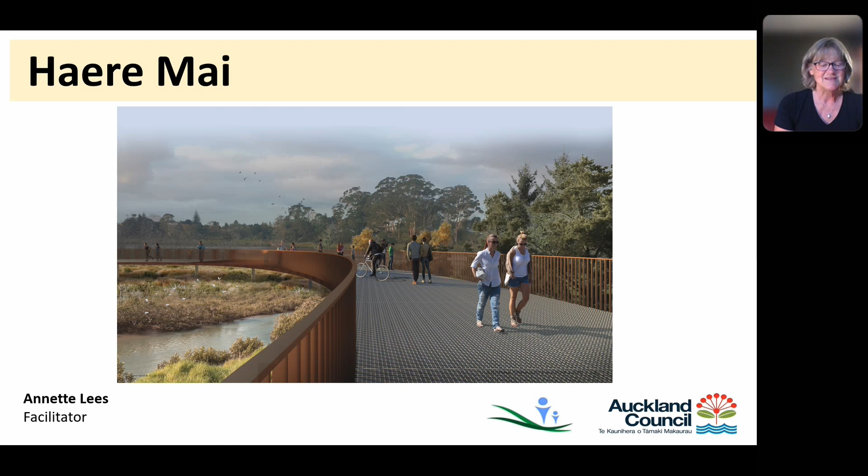Hi everyone, I'm Gill Thurlow. I work for Auckland Council as the local parks pathway lead for Te Whau Pathway project. I've been involved in the project for about 3 years, and it's a real pleasure to be here tonight because this is quite a milestone for the project, presenting the preliminary design for people to give feedback on. It's just great.

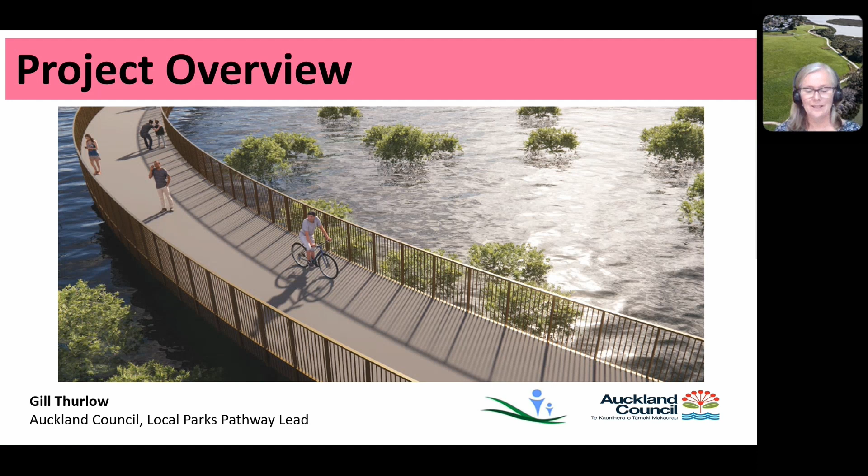So I'm going to start with an overview and where the pathway will go. Te Whau Pathway is a shared path, connecting between the Waitemata and the Manukau harbours. At one end, we've got Te Atatū South near the second exit on State Highway 16, and at the other end, we've got Green Bay Beach. It will be Auckland's only mainly off-road route connecting the two harbours, following the historic portage of the Whau River, and celebrating it.

Through the pathway and the project, we're really keen to connect people to the places, to each other, to the green spaces, and to the awa. It's an amazing opportunity, and it will be an amazing experience. In total, if we count the connector paths, there's about 15 kilometres of pathway, and just over 11 if we're talking about the main alignment.

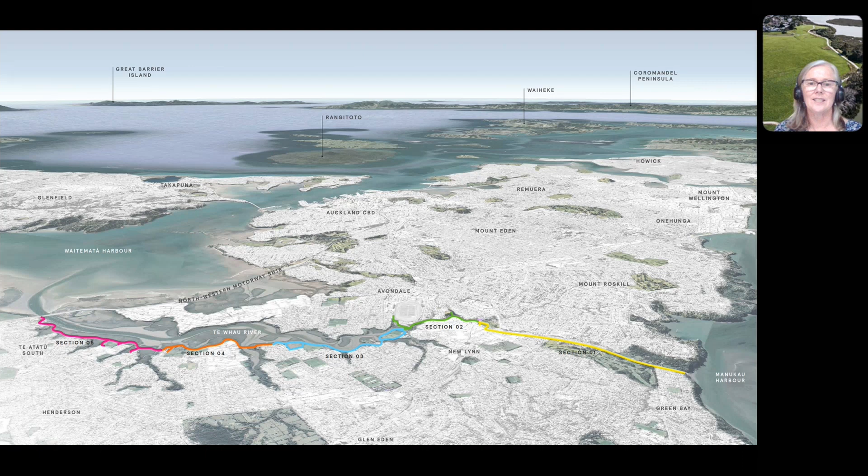So that's the pathway. In terms of the project, Te Whau Pathway project is a partnership project, and it's been a collaborative effort to get to this stage. There's been some pretty major milestones from its first inception in 2014. The idea was first seeded in 2014, and it was championed by the community as a greenways connection.

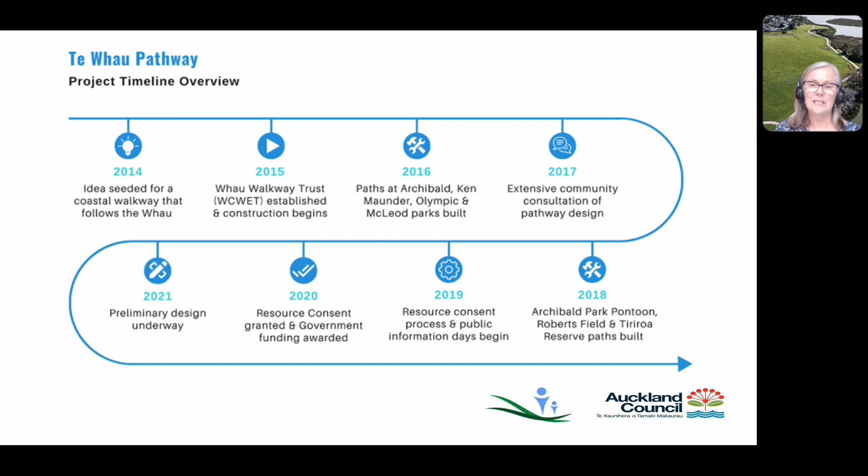As I said, the decision was made to build the pathway in sections, so concrete footpaths have been developed and built in some of the local parks. There's been extensive community consultation on the pathway design, which has informed the concept design and the landscape design plans. A real key year for the project was 2020, when the resource consent was obtained for the whole alignment. It was also the year we were fortunate to get some government funding for the shovel-ready projects. The construction of the sections of Te Whau Pathway have been underway already.

In 2016, we built some concrete paths in Archibald Park, Ken Maunder Park, Olympic and McLeod Parks. 2018 was for pathways in Roberts Field and Tiriroa Reserve. And most recently, we've constructed some pathway in the Rizal Reserve section in Avondale, as part of the shovel-ready build.

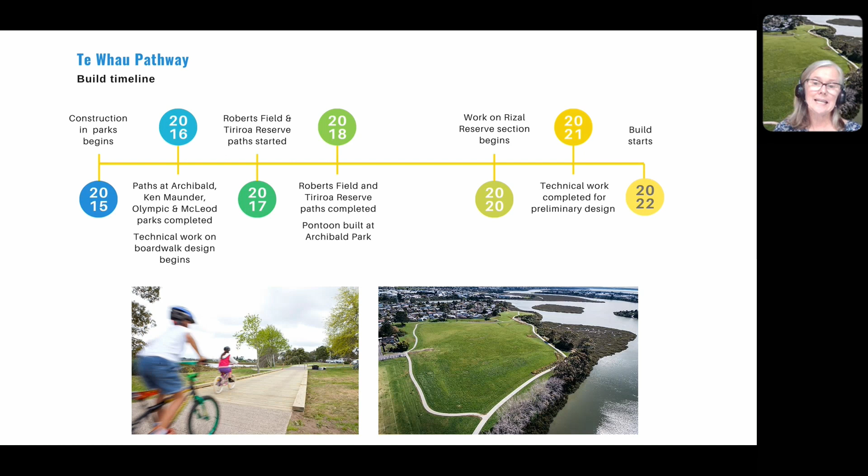It's been through a large amount of effort from our project partners, who I'll introduce to you soon, that we've built 3.7 kilometres of the pathway through the local parks to date. The majority of the path is still to be built, and that will be done in stages as funding becomes available. Yeah, it's all looking pretty good.

This is a really great overview of the pathway and its connections to other networks. You'll see the pathway as this bold pink line through here. Where the areas are dotted, those are the sections we've already built.

The really exciting thing is that the Whau pathway connection will go to the New Lynn Avondale shared path, onto the Waterview shared path, and then you can go onto the Northwestern Cycleway. That completes a pretty unique 21 kilometre loop, a really exciting addition to Auckland's growing walking and cycling path network.

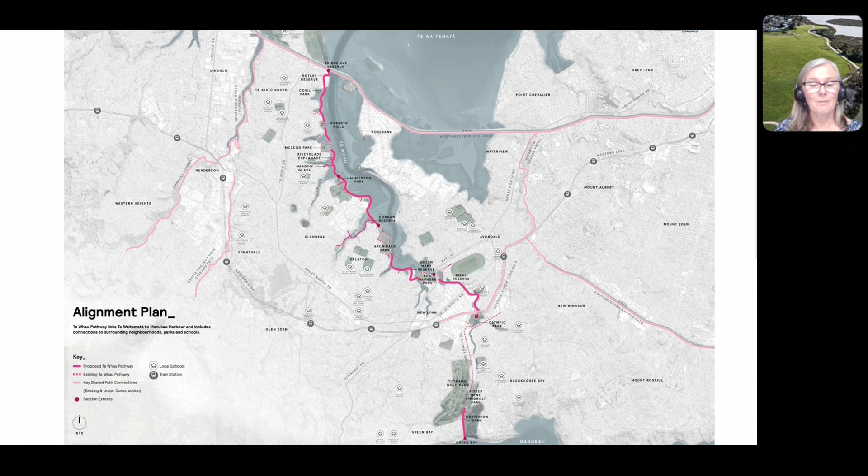The build and the funding, the things everybody's really interested in. As I said, 2020 was the turning point for the Pathways funding. As a result of COVID-19 and the pandemic, central government considered funding infrastructure projects valued over $10 million. These shovel-ready projects needed an immediate stimulatory effect on the construction industry, the workforce and the economy. Auckland Council applied for the infrastructure funding, and we were successful.

Crown Infrastructure Partners, the central government body, agreed to fund $35 million towards the design of the whole pathway and construction of sections 2 and 5. This is where our first shovel went in the ground, into the Rizal Reserve. And here we are, waiting and looking forward to your feedback on the preliminary design.

It needs to be noted that when we submitted the proposal to CIP, it was based on 2017 concept plans. Since then we've developed the design to the preliminary stage, based on all the information from previous consultation. The resource consent conditions have needed to be taken into account, as well as those early foundation documents. So the preliminary design of sections 2 and 5 has informed us, and we now know what's possible to construct with the available CIP funding.

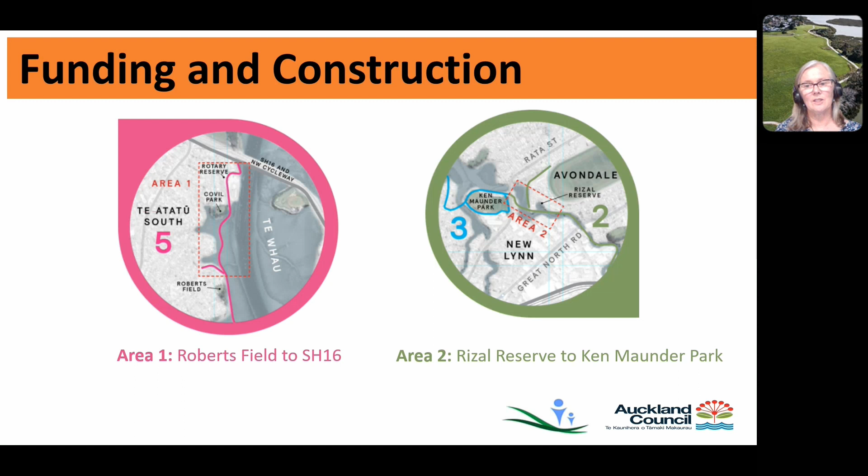This is the Henderson-Massey section. There are a lot of factors impacting how much boardwalk we could build. Early in the design phase, design decisions relating to durability in the marine environment, earthquake sustainability, and a requirement for a 50+ year design life with minimum maintenance all had to be taken into account. We wanted to build a long-lasting structure.

We have 168 plus resource consent conditions we need to respond to. We're very much aware of the building supply and construction costs in the current markets, so our design has to respond to all of those factors, as well as managing risk and the uncertainty around ground conditions. Those are some of the factors that have impacted how much of the boardwalk we've been able to progress in the design and the eventual build.

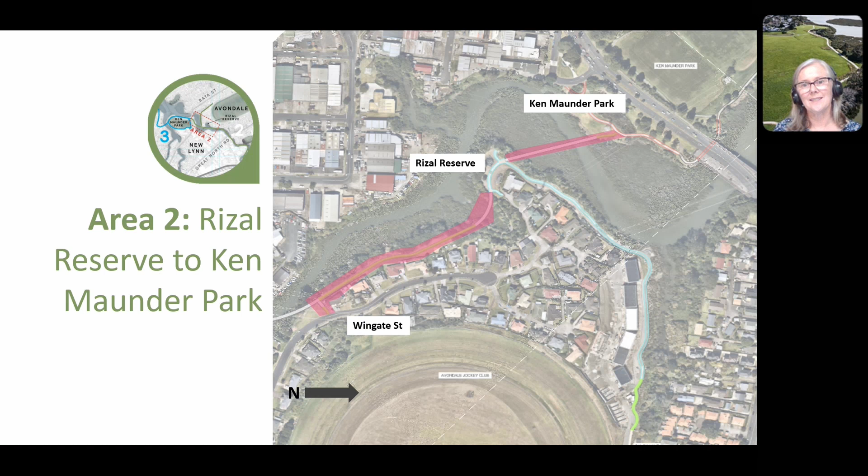This is the section in Avondale, in the Whau Local Board, and this is the pathway we'll be building - the slightly blue coloured path. This is our shovel-ready section that we've just finished. We've got a little bit more to do at each end, but this is that key crossing across the Awa. If you want to look at these in more detail, please go to our website.

Te Whau Pathway project is a collaborative partnership, and I'd like to thank our project partners: Te Kawerau ā Maki, Ngāti Whātua Ōrākei, Auckland Council, Auckland Transport, Henderson Massey Local Board, Whau Local Board, and the Whau Coastal Walkway Environmental Trust. Without them, the project wouldn't have progressed as it has, and we're very grateful for their ongoing support.

Thanks, Jill. That's great. I love that historic connection to the waka portage. And it's also good as Aucklanders that we get some silver lining to COVID-19 with getting that government support to build this.

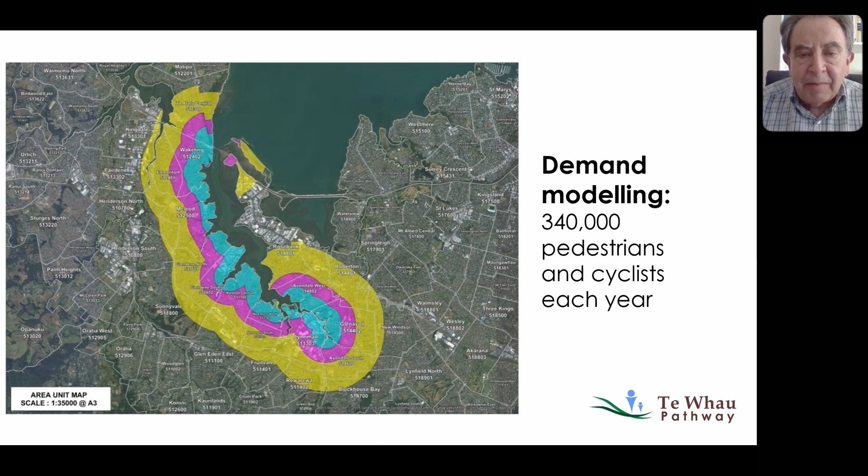Just a brief snapshot of the project. You'll see the area of influence, and modelling carried out by traffic specialists shows that when completed, it'll attract 340,000 pedestrians and cyclists each year, with almost an equal mix of recreational and commuter cyclists.

A snapshot of the Whau Coastal Walkway Environmental Trust. We were established in 2015 with the purpose of promoting the community and linking it to the Whau River. Our vision is to construct a shared pathway linking the Manukau and Waitemata harbours, while achieving social, cultural, economic, environmental and health benefits.

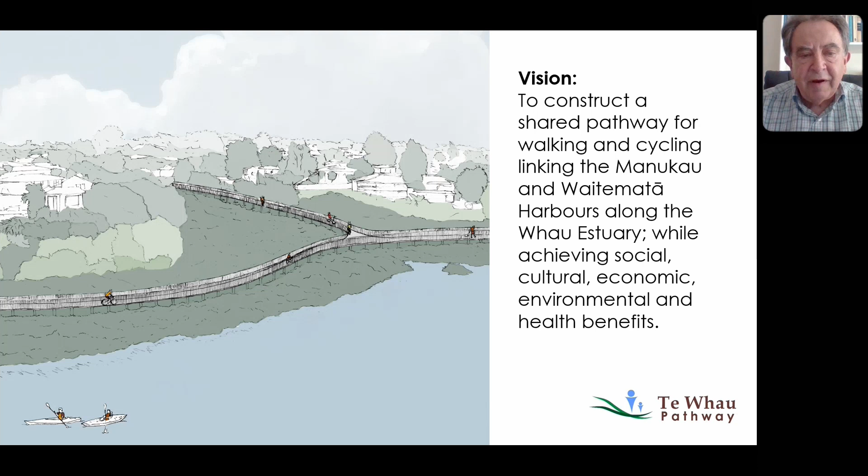We believe this is a unique feature of the project. It's not just a bit of infrastructure — we really want to deliver real benefits for the community.

We have 4 main objectives. The first is around the build, which is to promote and construct a multifunctional walkway to improve the conditions of life of members of the public at large.

Originally our trust raised funding through the Trust Community Foundation. We want to acknowledge their support, and also the support from Auckland Council, who have already put in about $12 million into the project. We also want to acknowledge central government, who, by stroke of luck due to COVID, funded $35.3 million last year.

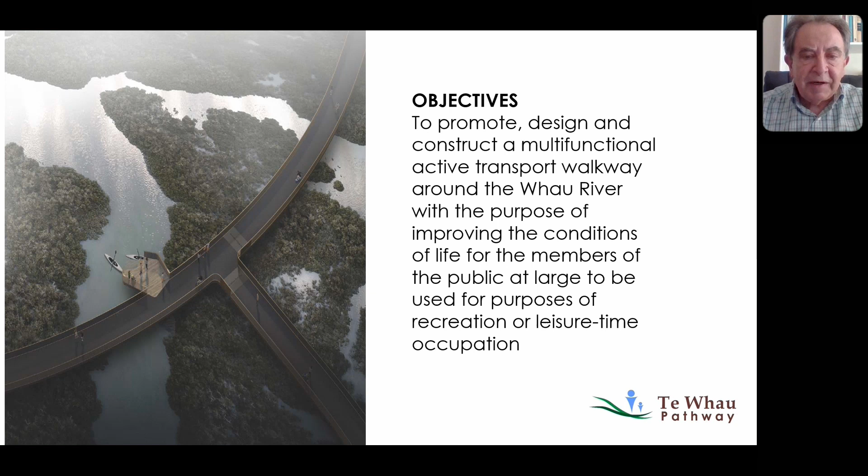Apart from the build, very dear to our heart is the restoration of water quality in the coastal environment, covering the whole Whau catchment area. Conceptually, the pathway will be the main ecological corridor linking the Waitemata and Manukau harbours, and to achieve that we need to work with partners to restore the whole Whau River catchment.

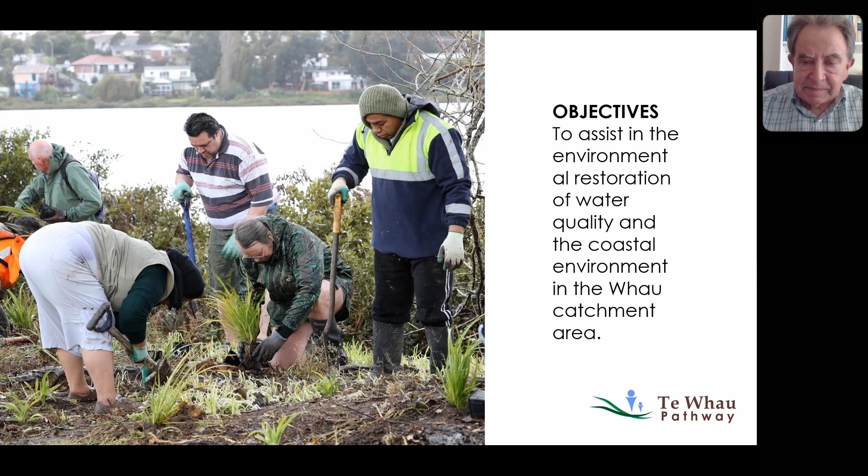Another dimension is to engage the community through public and functional art. You'll see some examples already — this one is at Archibald Park. That seating area was funded by Transpower as part of their community offsets due to the power lines.

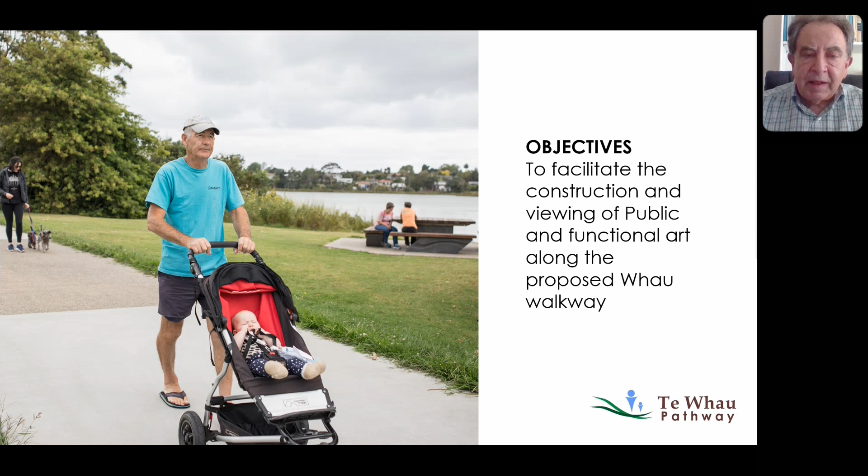Next year, we'll start working with artists to come up with art interventions and engage the community in the detailed planning of the arts. Very important that we look at providing a sense of place.

Just as important is acknowledging the heritage of the area. We're keen to weave into the pathway the history of mana whenua, the role of the portage, how it was a vital trade route, and a little known fact that Auckland was practically built on the Whau — looking at the history of the brickworks that produced bricks and clay pipes, essential elements in the development of Auckland.

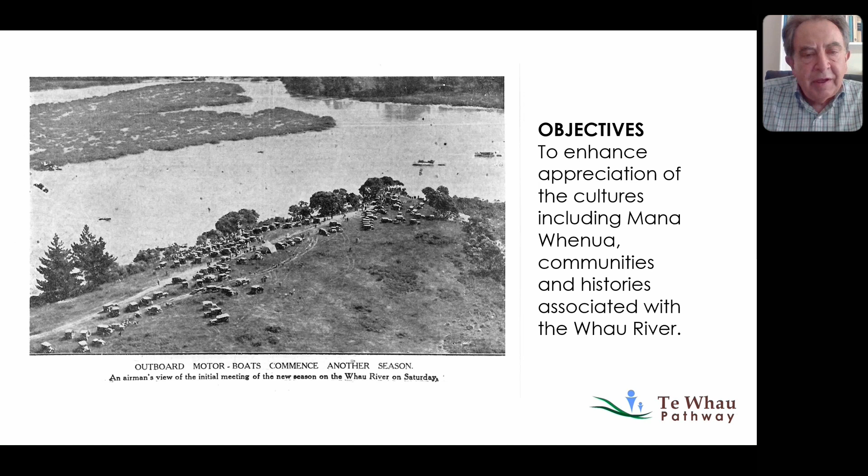Of course, the famous Crown Lynn pottery. We're keen that in the design elements and delivery of the project, we include the rich cultural heritage of the area. So what happens next?

This year we haven't made a lot of progress because of COVID. Every time we had something planned, we'd end up going backwards. But next year, these are the priorities.

One is to acknowledge the diverse community. Interestingly, in this area there's a large proportion of Maori, Pacifica, Indian, Chinese, and European communities, and they vary from neighborhood to neighborhood. So how do we engage those diverse communities?

Consult on the design, which is what we do at the moment. Environmental education — this would be about practical environmental projects, like building rain gardens in schools, something that really engages the kids. We've had a number of suggestions from the community about how to do that.

Develop an integrated plan attracting visitors — we'll be putting up ideas to attract visitors to the whole Whau destination. Events, environmental restoration through a wide range of techniques, and water activation — one strategy is to get people out on the water, and we're hoping that maybe in 2023 we'll be able to arrange a portage event, along with the arts program and cultural and heritage stories and markets. That's a brief snapshot.

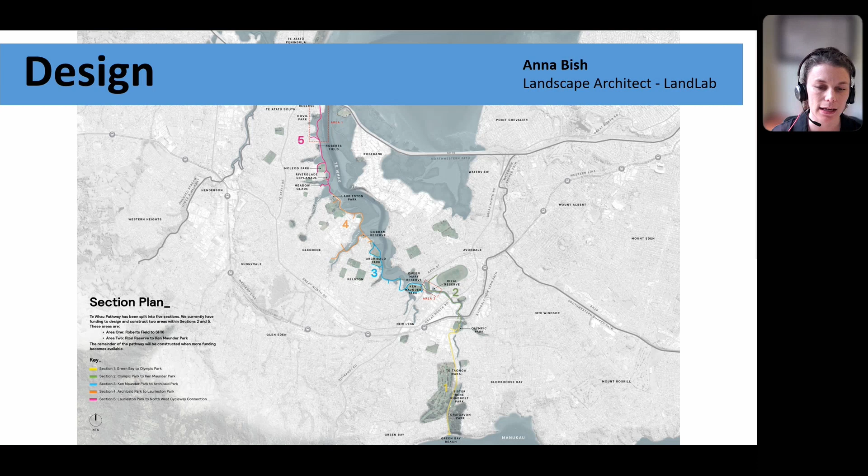Focusing on the design, the intention for the pathway is a design language that's elegant, cohesive, and sinuous, consistent across the whole length. It supports the idea of one pathway connection between harbour to harbour, creating a sense of identity in place. Here's an image showing a segment of the boardwalk.

As Jill mentioned, it's 4 metres wide - a really nice, generous, spacious width. It'll feel quite safe as well.

Some of the key materials we're looking at are FRP panels for the boardwalk surface, concrete piles with a 7.5 metre span, aluminium grillage, and balustrading which will have a coloured finish.

The colour is a key element that a lot of people are interested in. We went through quite a process to land on a colour, looking at a number of options, wanting something visually recessive and cohesive - something that isn't dominating, that complements the landscape and falls back into the background.

We ended up looking towards these goldy brown colours, informed by this rich and dynamic natural and historical landscape. It reflects Te Taiao, the natural world, the intertidal mud flats, the nature of Te Whau, and Kuaka - a beautiful bird which flies a really long way from Alaska through to New Zealand in one flight, the bar-tailed godwit.

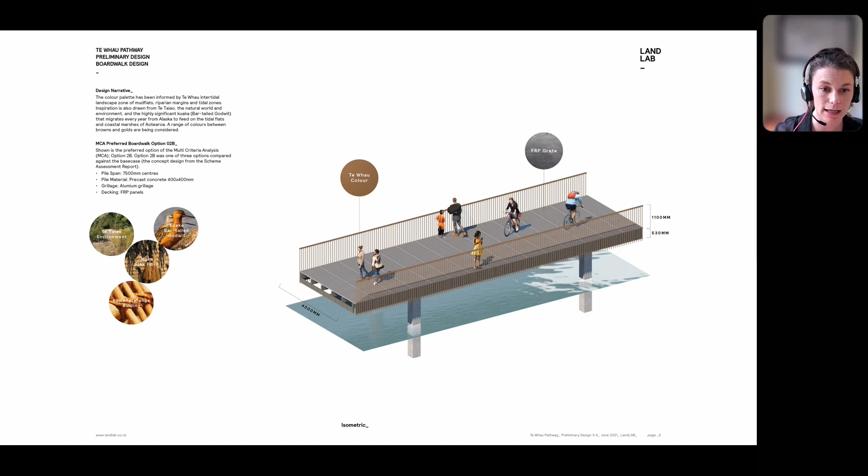This colour, we're hoping, provides a unique identity for the pathway. This is a view as you're walking along the boardwalk - not from a particular location, just a render for look and feel. This coloured steel reflects the overall design narrative we've just touched on.

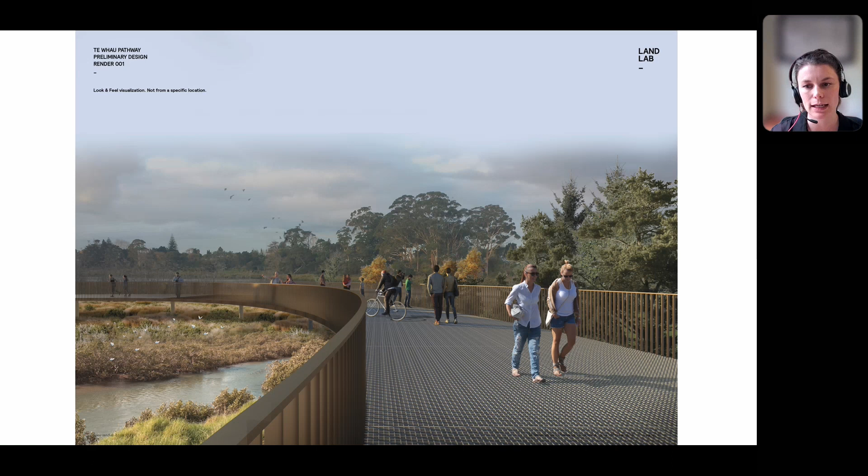There'll be moments of timber and solid panels throughout the length, providing opportunities for wayfinding, cultural integration, and artistic opportunities. So it's not just a boardwalk - we've got a series of designed elements that append onto it, creating heightened user experience and opportunities along the pathway.

There are moments to pause, rest, access water, navigate, or bird watch if you like to do that. As Jill mentioned, we've been engaging with mana whenua throughout the process, and we're now developing a cultural framework alongside them that will be consistent across the boardwalk, informing the design and the pūrākau, the storytelling of the elements.

There are opportunities to integrate pūrākau stories about the area, interpretation and wayfinding into these various elements. This is a high level snapshot of the elements - we acknowledge we can't build everything right now, but we're future proofing, hoping to be able to add these to the pathway whenever it becomes possible.

Now I'll zoom in on 3 key elements - these are really the heart of the consultation. Have a good look at them; we've got more information on Social Pinpoint and the website. We're really keen to get your thoughts on these elements, their design, look and feel, as well as where they'll be located.

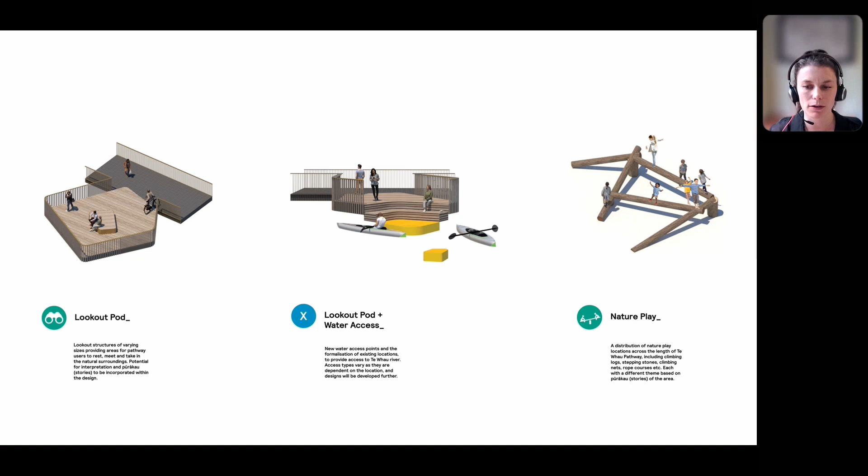This is an example of one of the pods. The design intent of these is to pause, rest, meet up with other people. They might be a point where you say, let's meet at the pod and then go from a walk from there. They're also to take in those beautiful views, bird watching, if that's your thing, and they're located to take advantage of the view shafts - some are in high points, some are at lower areas. Anywhere there's a view should be celebrated. There's potential for that pūrākau storytelling and interpretation to be incorporated into the design of these.

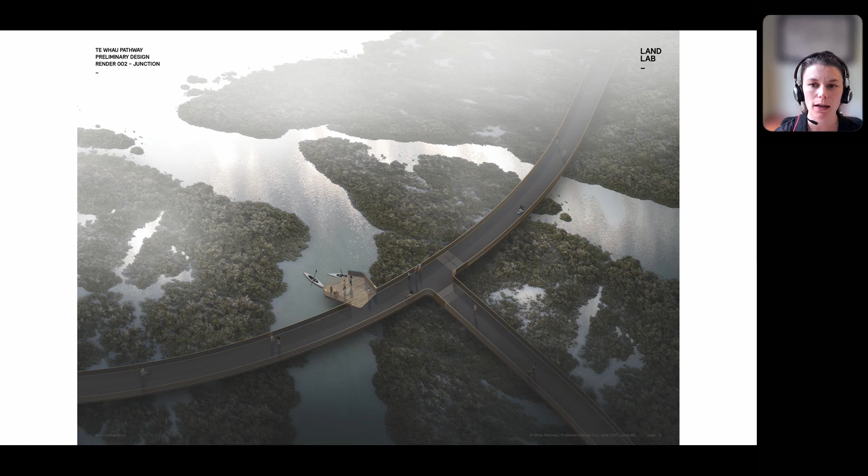This is one of the water access types - appended onto one of the pods we just saw on the last slide. The design intent of these is to create access and engagement with Te Whau. These have been spread across the length of the pathway, looked at in coordination with the CLG. There's various types - ones with direct launching, and others which are more a stopping point to rest and explore.

This one, type C, is the latter - one where you can stop, tie up your kayak, hop out, stretch your legs, and have a bit of exploration of the boardwalk. If you're walking along the boardwalk, it's an opportunity to wade, swim, or for reflection.

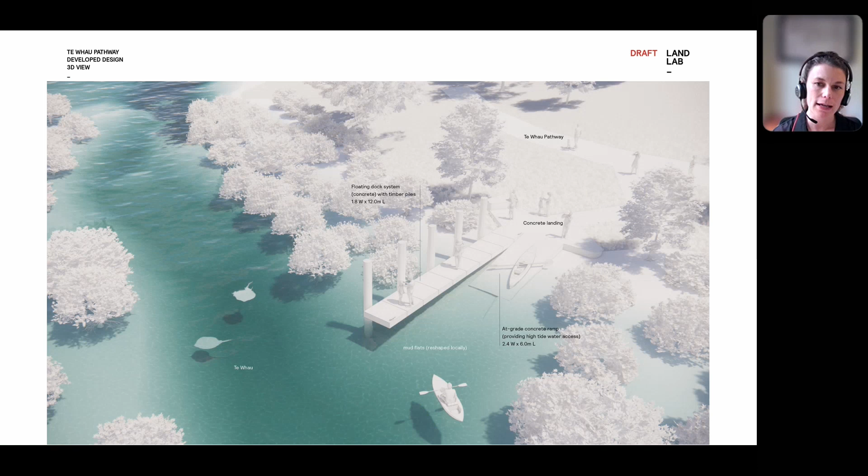This is another type of water access, what we refer to as type B. This is more for small paddle craft, where you can actually launch your kayaks with ease. They'll have access to the street network and parking along the street, so you can tow your kayak down and hop in from there. Some of these are retrofitting existing access, like at Roberts Field, and quite often these will be tidal.

And then nature play - again, spread across the land-based parts of the pathway. As I was mentioning, we've got various different types, each based on a different theme, tying into that integration of pūrākau storytelling. We might be able to integrate whakapapa, the naming, and create moments of interest and discovery, educational opportunities for children to engage with.

They'll all be made of more natural materials and have a consistent and cohesive language across them. The intention is to have something more natural that ties back into the landscape and is more explorative for children. There's already a good number of traditional playgrounds along the route with the standard swing and slides, so these are intended to be smaller, more bespoke - just moments for children to interact as they progress along the pathway, leading on to those bigger playground moments, which might be smaller than some traditional play elements, like what you'd see at Archibald Reserve at the moment. It's a more natural and engaging opportunity.

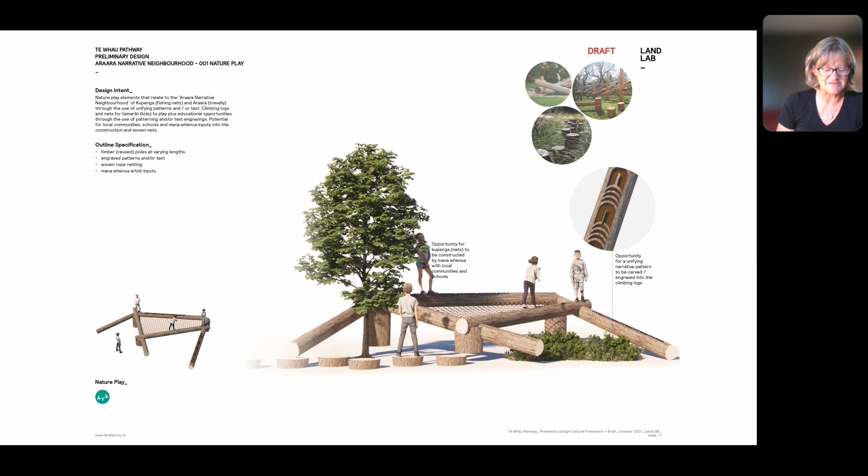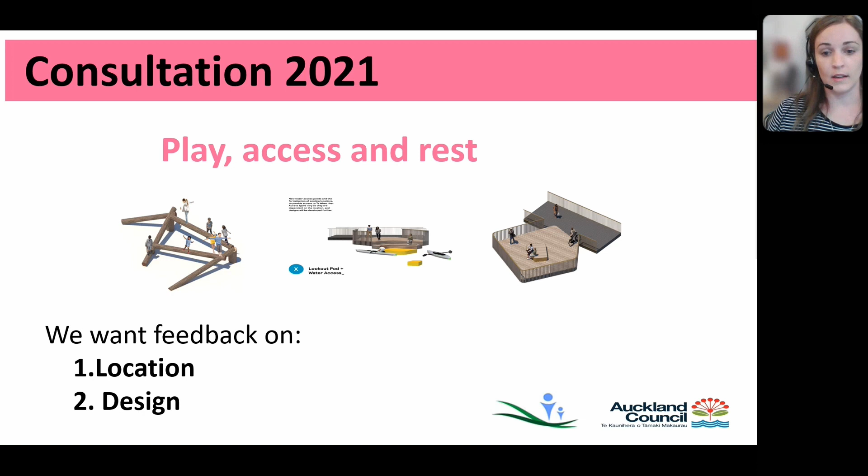So we want feedback particularly on the location, from a local and user perspective, visitors - have we got those locations right? Is there anything we need to change, amend, move? And then the design - how do you like the look of that in that particular location? That's going to be really important for the team to then firm up those designs prior to getting some of the parts constructed next year.

This slide is my final slide before we get into some questions and answers. There's been some great ones in the chat I'm keen to get into and hear from more people in the project. So in terms of getting that feedback from you, we've got a few different ways you can do that.

The exciting one we've been working on for a while now is our Social Pinpoint site. So that's where you can click into the map, have a look at those particular elements, those areas that Anna was talking about, click on where they are, and have a look at what they might look like.

There's a sort of example design in there, and then you can drop your feedback into that map. Everyone can see it, it's live, and we've also got a chat bot on the side that will ask and prompt more questions. That's a great way for us to get feedback on locations and design of those elements. We've also got an online feedback form through the Auckland Council Have Your Say site, an online survey, and there's also a hard copy form if you want to download it and send it back to us. And we've got an email address which we will continue to monitor, so you're welcome to send through any thoughts as you have them.

And we've got a great website that has been an awesome thing the Trust in particular has done, so there's heaps of information on there. There's the link there, but if you Google Te Whau, it should be one of the first ones that comes up, and there's a lot of new information on there. The landscape plans Anna just went through have even more detail on the website. Have a look, and don't hesitate to get in touch if you need us to show you where to go to find it.

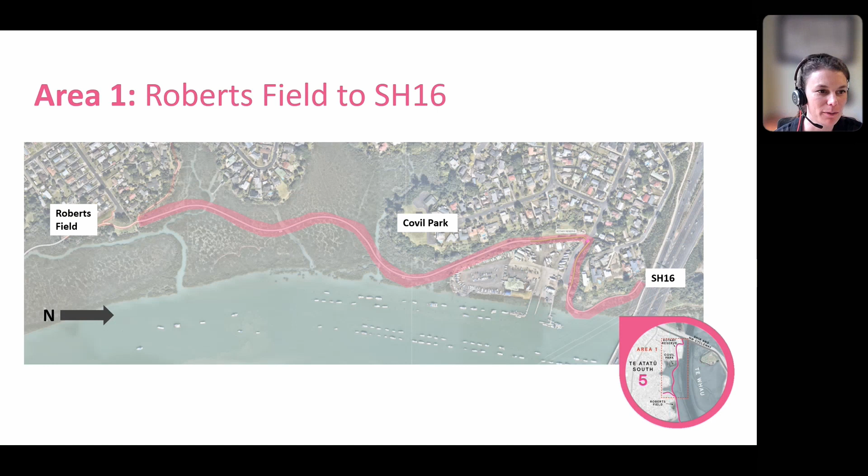I can, Anna? Maybe touch on just a little part of that from a design point of view. Maybe if you could just jump to that proposed elements page, Sarah. So where we've got a transition from boardwalk to an existing concrete path, the boardwalk will continue to be 4 meters in width. At that landing point, there might be a flare in the concrete, a widened area, and then that'll taper back down to the 3 meters — that'll be in the concrete. In the middle of this page, there's one with a little purple dash next to it that says transitions, so that's a visual example of what we might expect where the boardwalk ties into the concrete. There'll be some opportunities there for wayfinding and things like that, but certainly the boardwalk won't narrow down — that will remain at 4 metres, and the concrete will be built up to that.

So I think the question was around future-proofing it for a wider concrete footpath in the future. So yes, I think that will be future-proofed.

Thanks, Anna. There's another question here, which I think is a really good one as well, about the height levels of the pathway, in particular where this boardwalk is going over the water, and what the height is over some of the tributaries as they enter the Whau River. So that probably is a bit of a Graham question, maybe a James question.

Anyone? Yeah, I can go. I provided some answers, I think, to both Darren and Ben in the chats, but probably for everyone's reference as well — through the resource consent process, we agreed on setting the height. It had to take into account a number of things in terms of constructability and also sea level rise. We had to assume through that resource consent process the amount of substructure we would need to be able to build it, and at that point in time we weren't 100% sure on what the substructure would be built of. So, long story short, at mean high water springs — what people would call high tide — there'll be a minimum gap of 1.06 metres for current tides, and that may reduce over time as sea level rise occurs. But equally, there'll be longer periods on the tides on each side to enable access underneath.

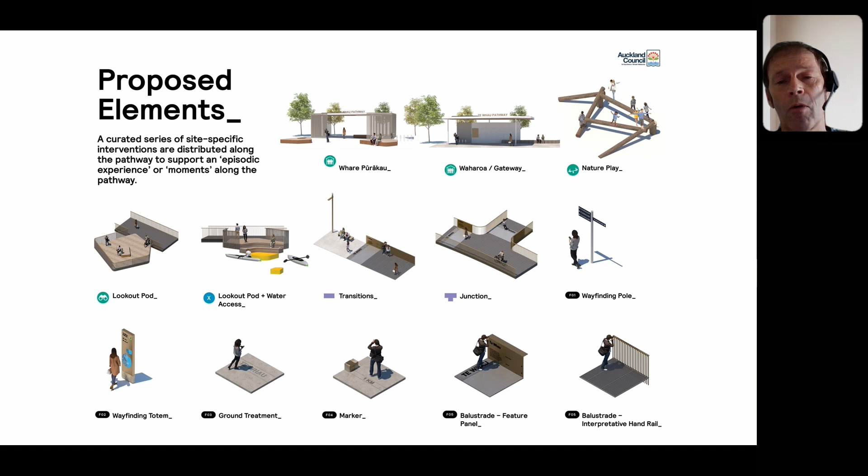In the Henderson Massey area, the Henderson cycle connections are underway, looking at having McLeod Road as one of the areas connecting straight from Henderson all the way through to Te Whau. Likewise for the Whau local board area, the connected communities project looks at the new North Road and down onto Rosebank, which alongside the New Lynn to Avondale path will add another dimension to the connections.

Kia ora, thanks so much Simon. I think there's been a lot covered, and we're doing quite well on time, but this is people's evenings, so I might just have two more questions which I think are really good ones to answer. Any other questions, we will compile and put on the website for answering. The first one was about privacy for property owners and how that's been taken into account along the pathway, more around the resource consent process. Graham, or maybe Jill, that might be a good one for you - how have we tackled that?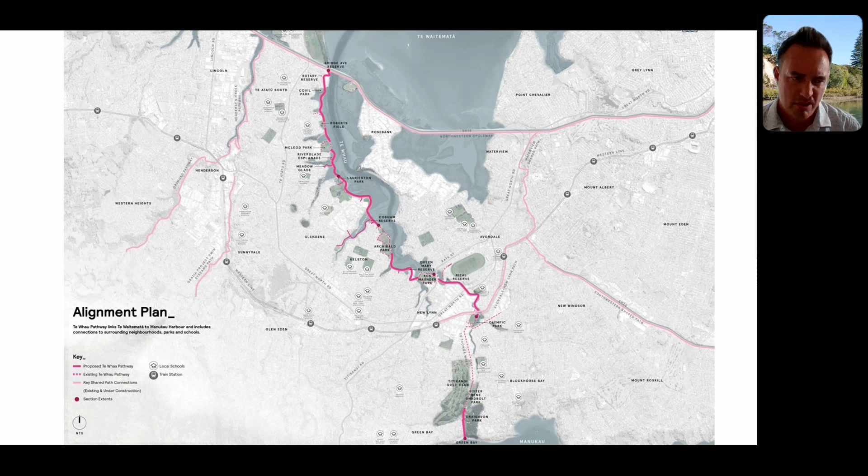Yep, that certainly was a discussion point through the resource consent process. A lot of individual landowners had expressed concern about landscape and visual effects. There was a comment about lighting as an example, in terms of light spill at night, so there's going to be lighting built into the handrail to reduce that light spill.

In terms of landscape privacy effects, I don't know the exact situation of the person who made the comment, but primarily you have two types: the landward sections where the pathway might be getting quite close, and the boardwalk, which isn't directly on their land or close to them. We've worked closely in previous sections with landowners looking at planting, particularly along some margins, and in some cases fencing has been used as a mechanism as well.

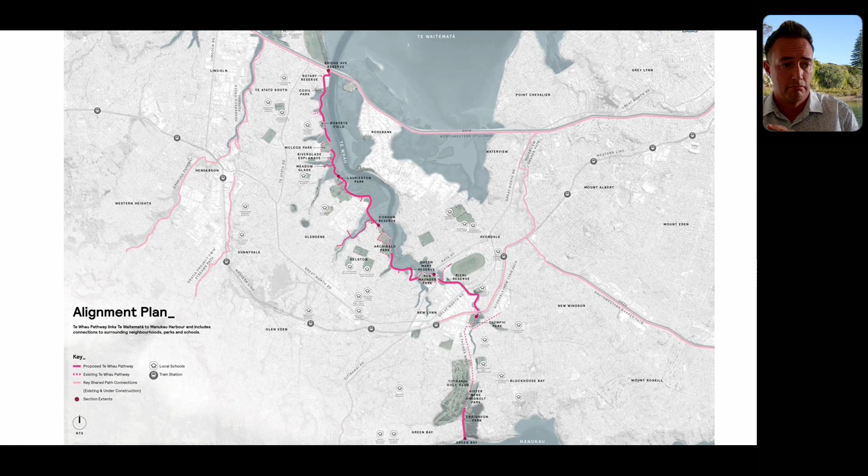So if people on the chat have particular concerns about their direct properties, please get in touch with either Jill or myself, and we could show you the specifics of their site or land and how it would relate directly to them. That would probably be the easiest.

Thanks Graham, appreciate that. So the one other question I've got from Annette was around pods and pontoons - the water access points, will they be floating pontoons?

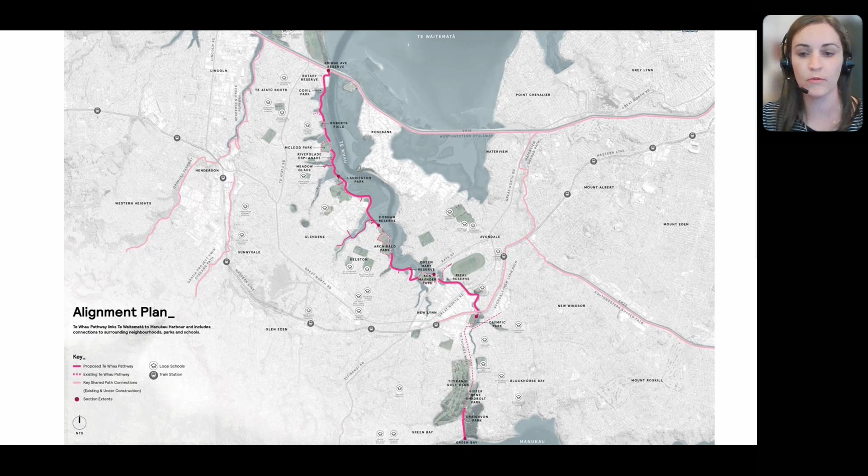So yeah, we've got some different types of water access. When it's off a pod connected onto the boardwalk, this typically will be a stepped-down water access, which allows for tidal fluctuations and provides access into the channel. At a very low tide, in some cases there may not be direct access to water, but we've tried to locate them in deeper channels. So the access off a boardwalk will be stepped and fixed.

When we have access off land, these provide greater opportunities to have floating pontoons. There may be some where they are a fixed option as well, such as a jetty. We're exploring all these options at the moment, and they are very site specific, depending on the terrain of the landscape as well as the depth of the channel and the mangroves around, etc. So there'll be floating pontoons as well as fixed options.